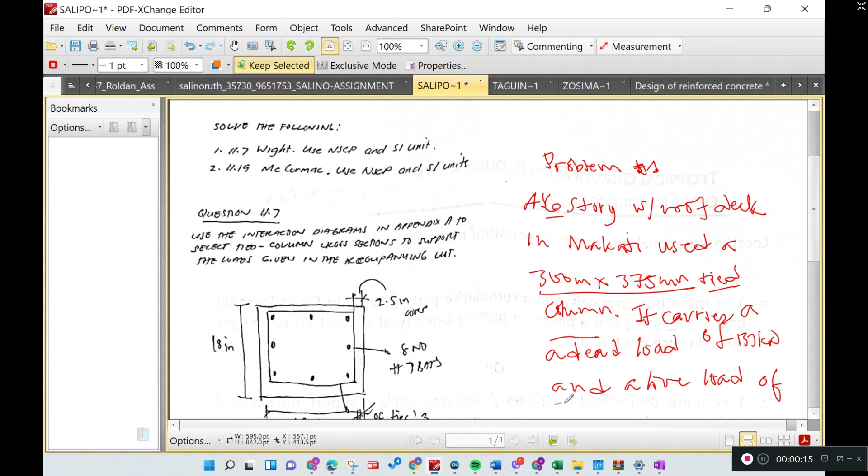Kilonewton and load. Sinakita ko lang sa inyo na pwede naman isulat eh. And a live load of 206 kilonewton. Diba? So, alam ko na kaagad na ito, dead load ko eh. Yun, in live load of 206. Can I still get that?

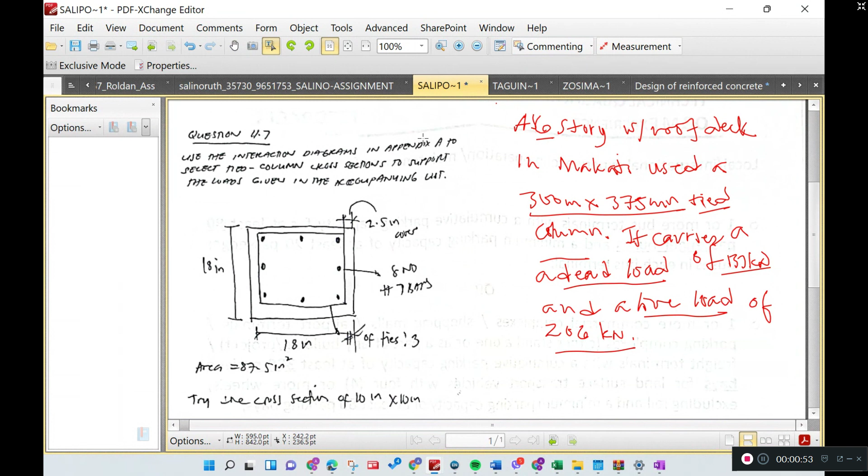Anyway, so please write especially the assignment. Now, if we are in assessment, it's up to you whether you want to write it or not. Para, di ba, yung iba, napapansin ko lang na what they did, para at least yung kanilang utak, they write muna. Some of our students are like that.

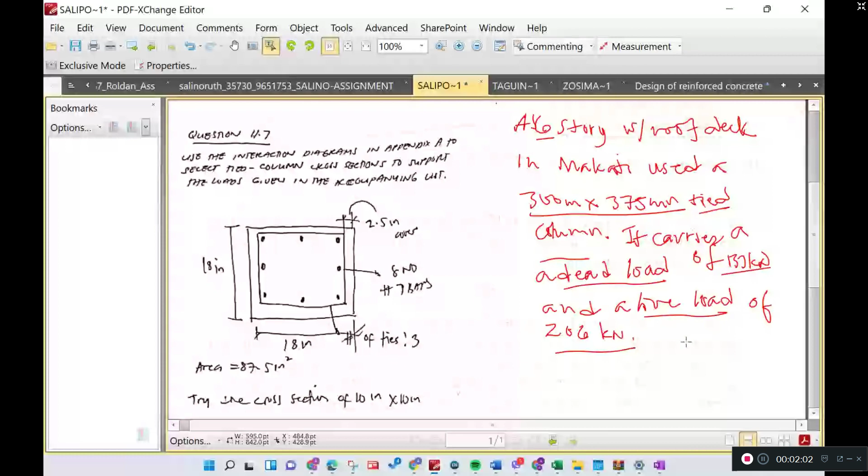And like those assignment, I would like you to write there because you are not, I think 28, 29, 30, it's 2 days. Okay, 2 days with 2 problems. We usually just have 3 hours in 3 problems. You can see the difference among the 2 assessments. Okay, assessment. Now, assignment can also be an assessment. We are trying to assess first whether you are going to do it. But it's an assignment. Number 2, whether you have correctly answered the assignment.

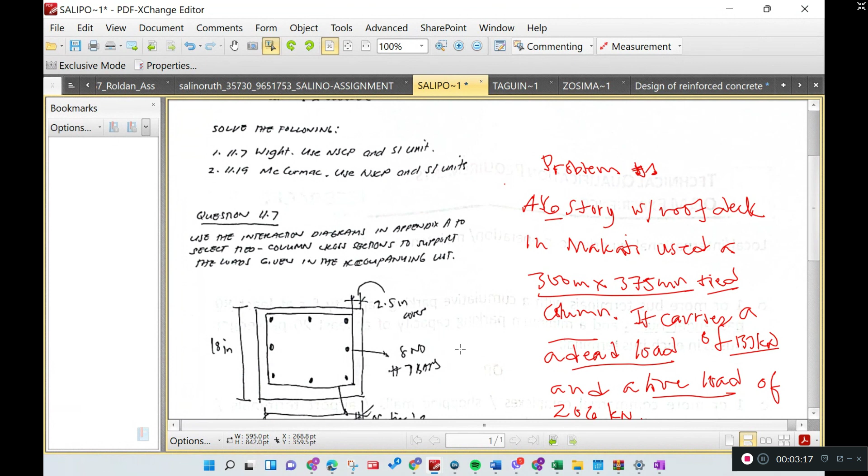But there are 2 things that really matter when you are given an assessment. So assignment is an assessment in a way to check those behaviors, psychological. When you do that, only when the time has to be submitted, yung naiba yung nangyayari, hindi mo na nailagay. Saka iba din yung writing mo, so hindi siya makukumpleto. Okay? So I'm telling you na that's psychology. Kasi patapos na eh. Kailangan mo na i-submit eh.

But notice that assignment is as important as quizzes. I can only just give it 10%, or I may not be giving it any percent if I see that when it precedes a quiz, then I would just say I think it's alright. I can get something from the assignment. Just like what I did last time. In our slab design, I noticed that a lot of our students did not do it. Please do it. Okay? Please do it.

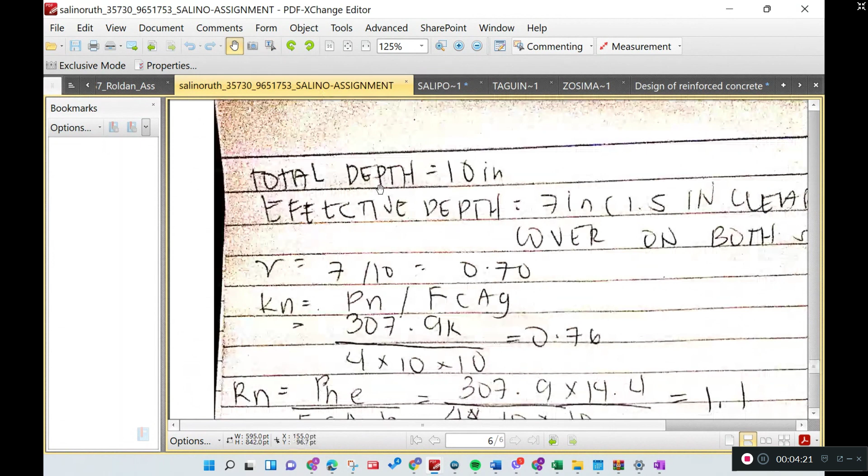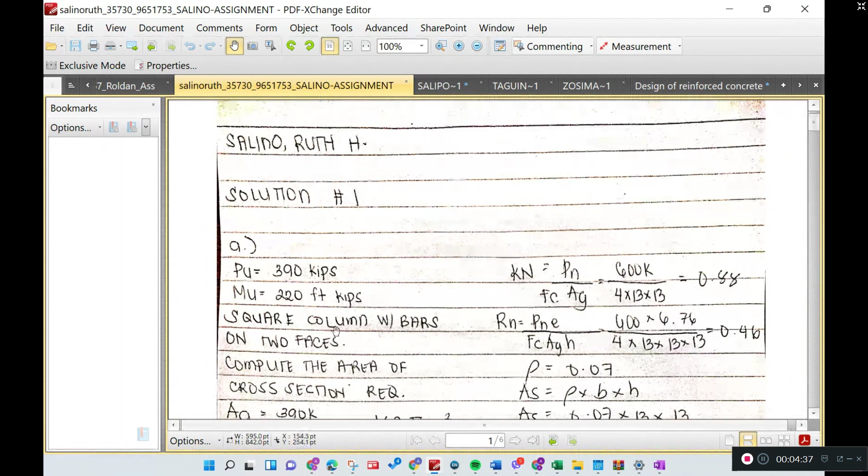So we also have something here. There are 23 of them. As I said, I checked this one. I put them in my spreadsheet, but I would like to tell you that he's right. Ito lang yata sumunod eh, si Christy. Christy is not around yet. So I'm just giving you that. I hope that it's clear between us. So this one also is not clear. This one is from Roldan. Is Roldan around?

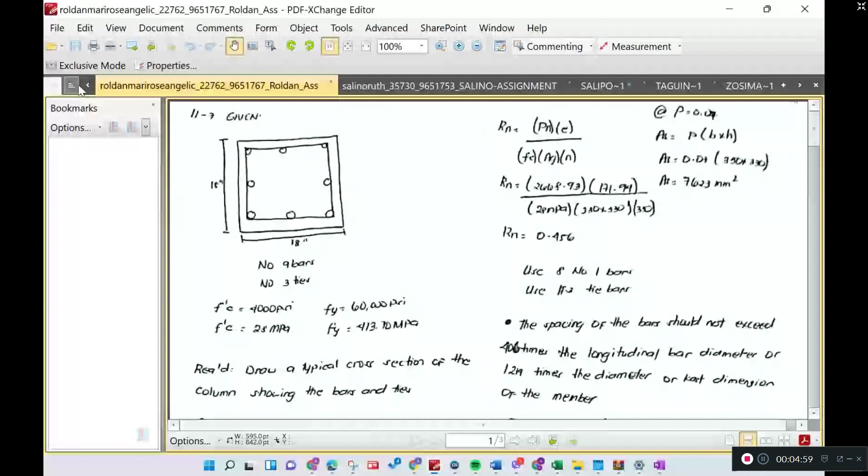Let's have Punelas, sinulat, isa lang nagsulat, at saka si Dolatre. Nga lang, hindi masyadong clear yung kwento natin. But to me, it's okay. Padlina, let us check. You see, sinulat ni Padlina. Then, let us check. Okay, and you, pero dito, nilagyan mo. So, those are the things that you have to take care of.

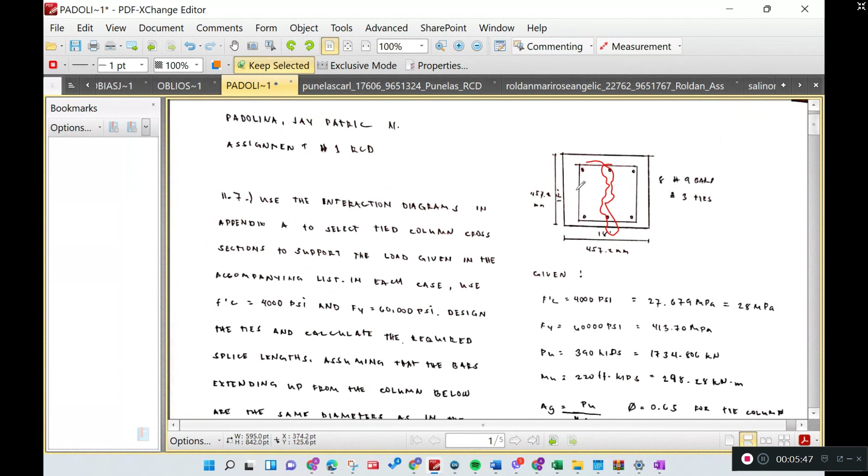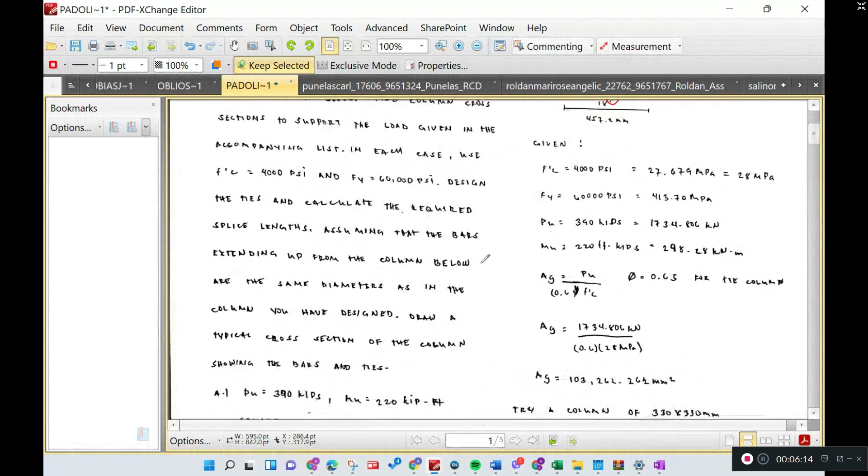So, we are now solving. These are many phases that I would like you to take note of, okay? So I'll repeat. I'm telling you that your quiz is this, okay? I give you a chance for some of the students who are doing it. So the spacing of bars should not exceed. Okay, that's good. This is for compression.

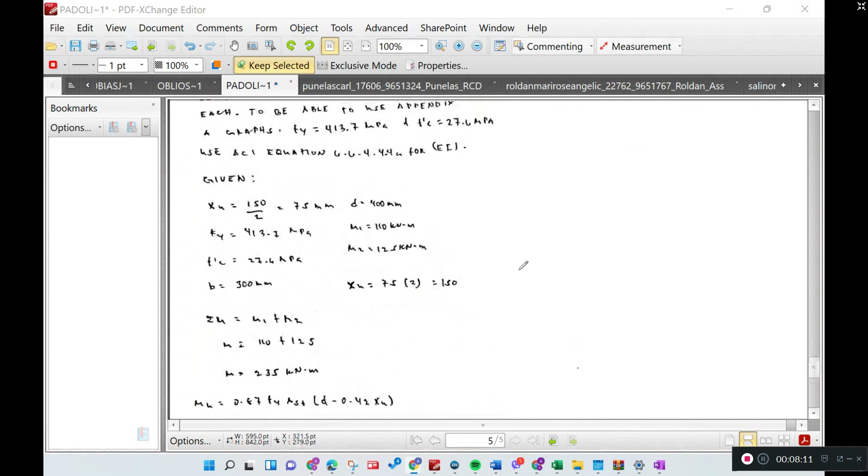I'm going to give you an example, but not exactly this. The same problem, but not exactly this, because I'm giving this one as your assignment. Okay? Because I'm giving you a similar thing, just like if it's a banana, I'm going to give you banana. The same thing. But again, what is important is this. Okay? You run a mile. I think that's important. What is important is that I would say a mile, okay?

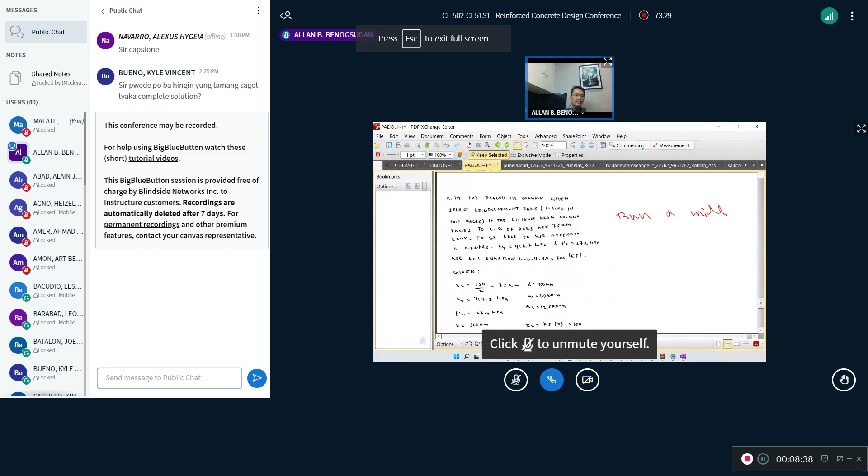Kahit sabihin ko na mag-discuss ako many times, okay, I have so many courses already. We give some examples. Some examples are not effective. Some examples na binigay the student. But with a conceptual example, maraming natutong estudyante. Kuha mo, Kyle? Kyle, are you there?

Yes, sir. Why is it important? Because, say for example, you have a column. You have your column subjected to axial load, and there's a moment. Okay, there's a moment there. How are we going to do it? So, are we thinking of a biaxial? It's not. It's only one at a time. Okay, so this is what we're doing.

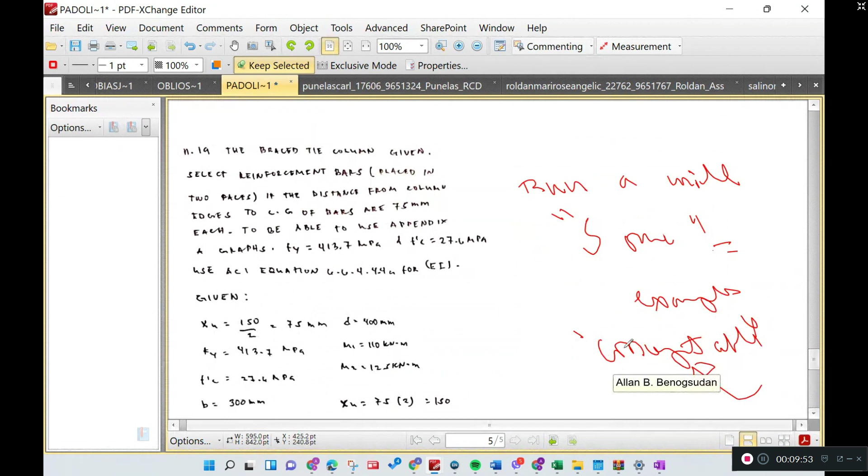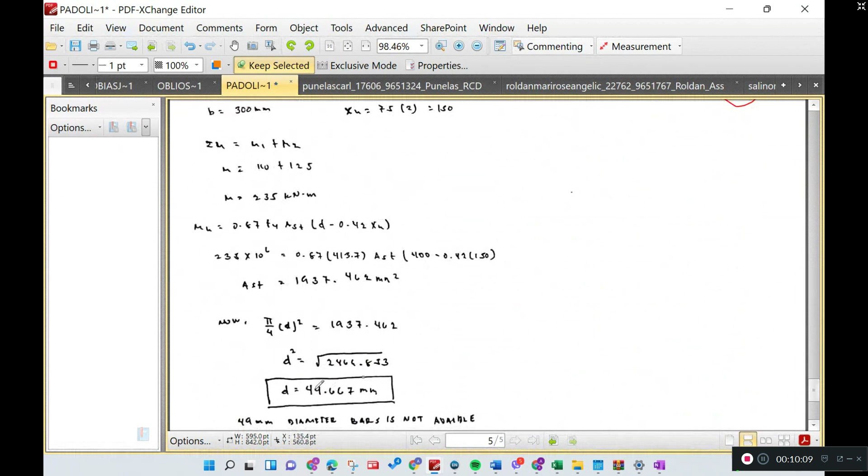I'm going to give you an example. After this, I'm just showing you so that you don't get surprised. I don't like surprises. I would like you to know how I check your work. And that, to me, is not okay. Alright? So, 11.19, not done. Not done. But there's something in here, but it did not get through. Let us check what is in there.

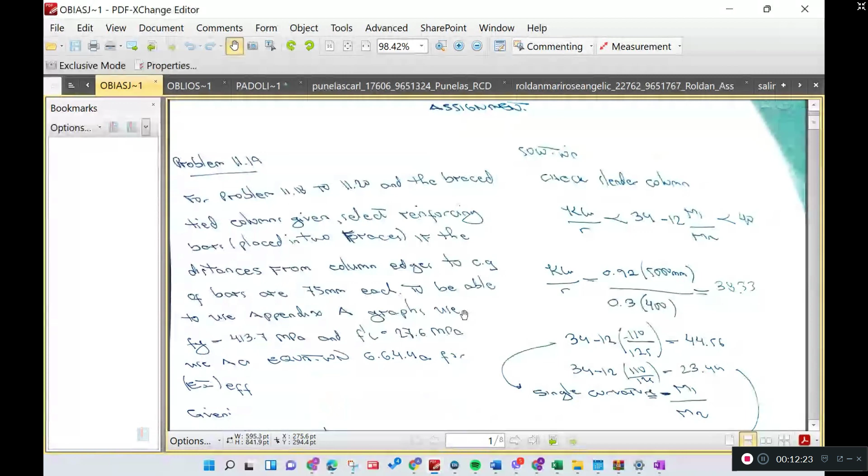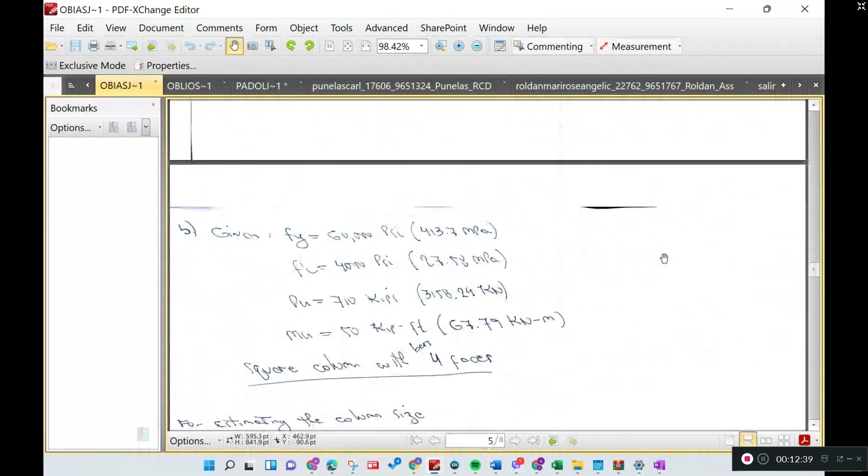So, this one is Obias's. I think we've been doing that one. And another is, okay. Check if the column is slender. Check the slenderness of this column. This column. What happened? Obvious. Okay, that's there. But you did not put it. Okay, so let's have an example.

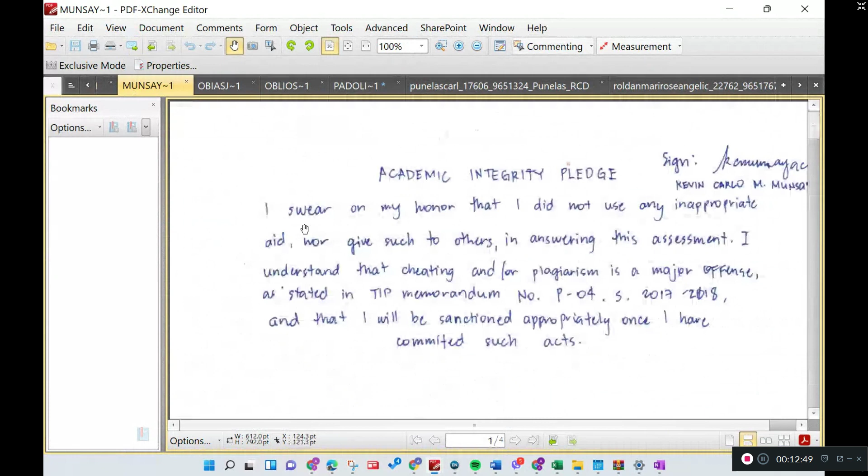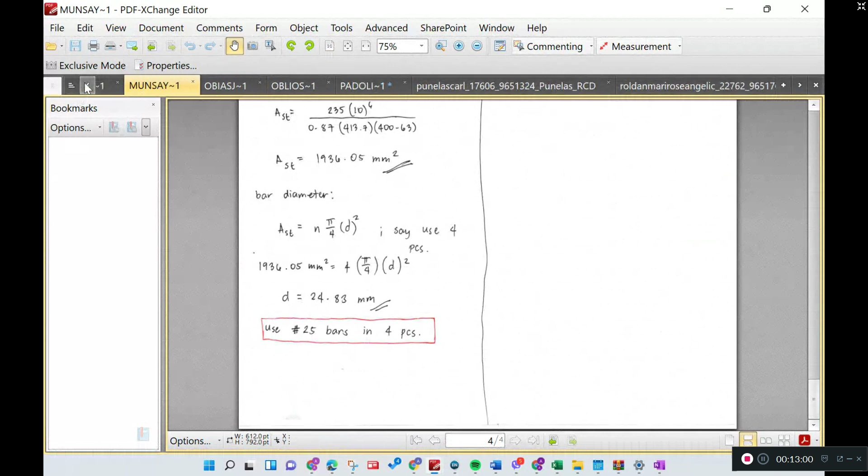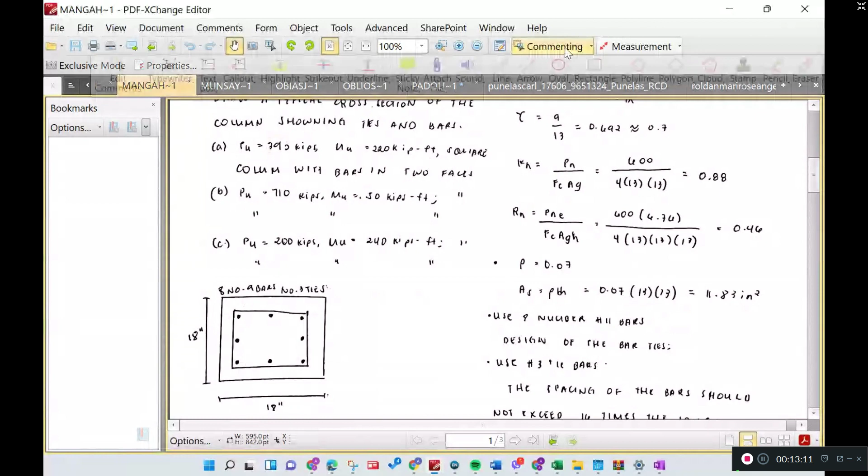Mangah is here. Wow, I like this. You have to write, okay? And so we've shown you these. Use diagrams, yeah, that's it. So this is very important. This is an important matter for all of us.

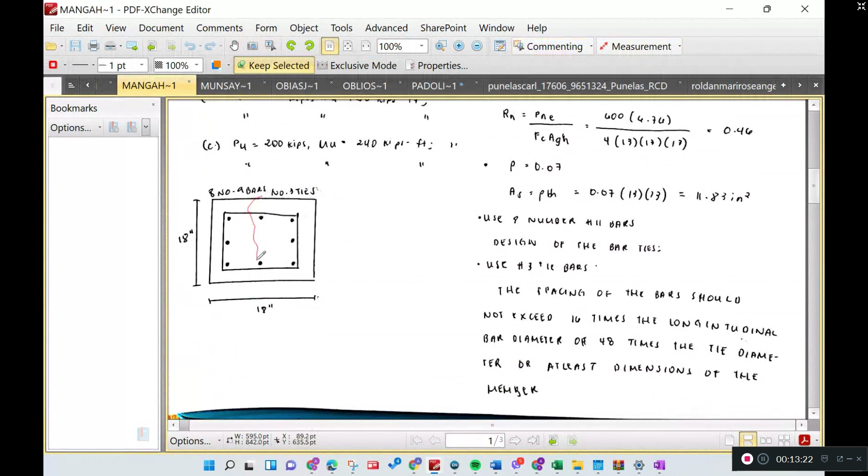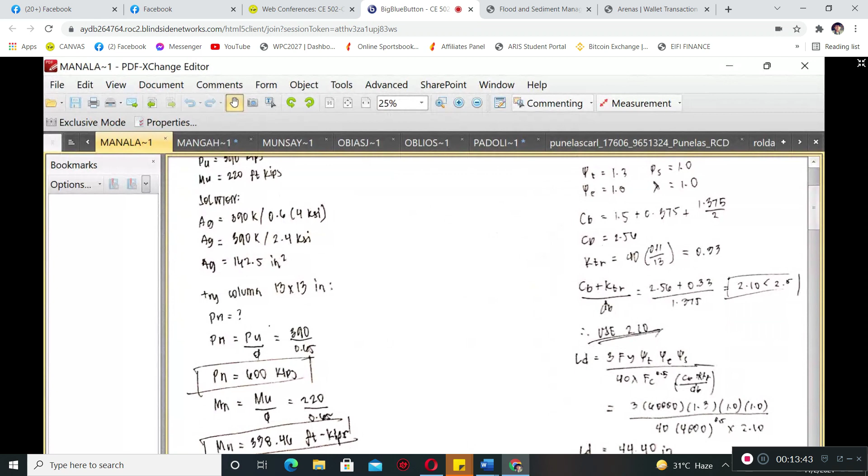Number 2. Manalastas, are you there? Sulat lang. Try a 13 by 13 inch column. So that's the reason why we tackled this. You can see, Kyle, why we tackled it, why we have to check your submission and tell other students how it would be.

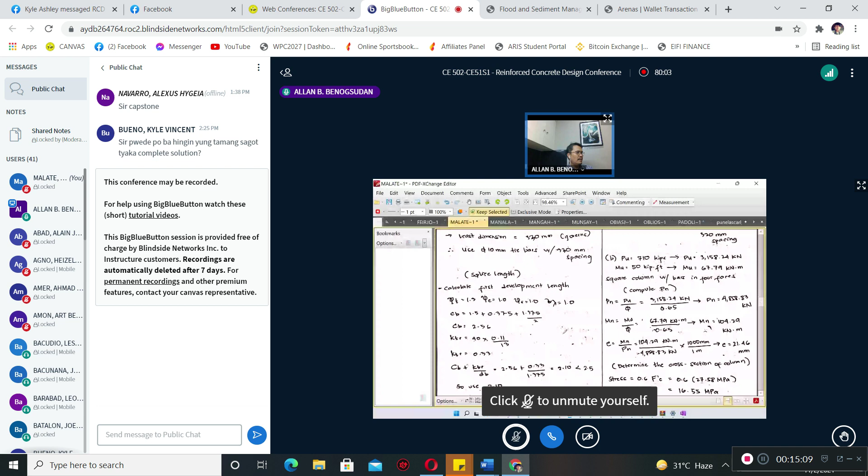Here, I would just like you to appreciate that, putting that one there. But I would like you to write. Okay? I would like you to write. Let us solve one problem. Okay, one problem. Good problem.

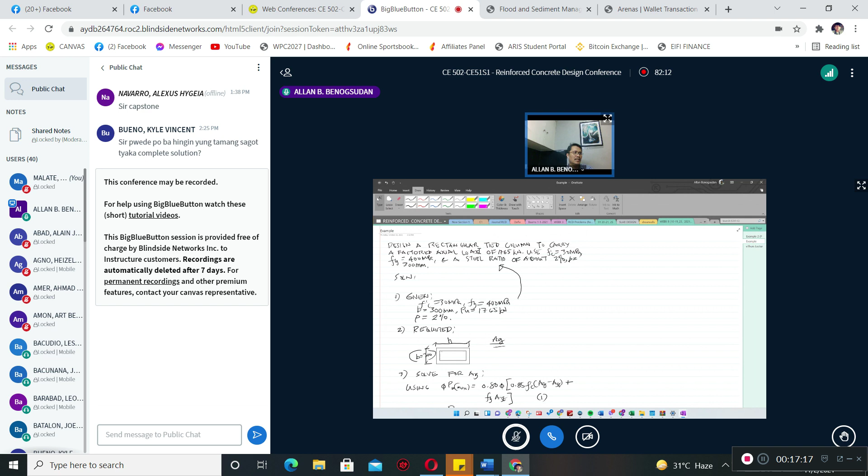Design a rectangular tied column to carry a factored axial load of 1765 kilonewtons. Okay, now my question is, is this detailing correct? Got it. Okay, so let's have a problem. Dito.

Let's have the problem. Bilisan yung bilisan yung pituan. Okay, so, okay, now

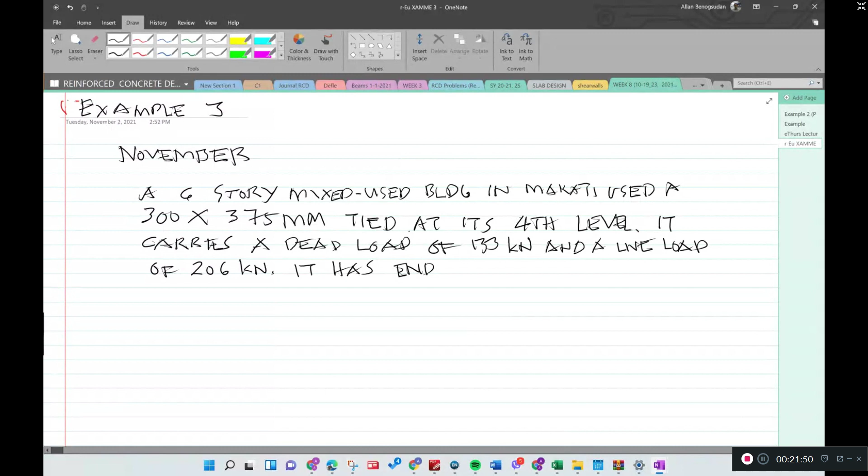fy 413.70. And K is equal to 0.83. This is given. And that's why you can see, I asked earlier, Amon, how did you get 0.92? Okay, was that given? So I think that should have been the answer. Okay, it was given.

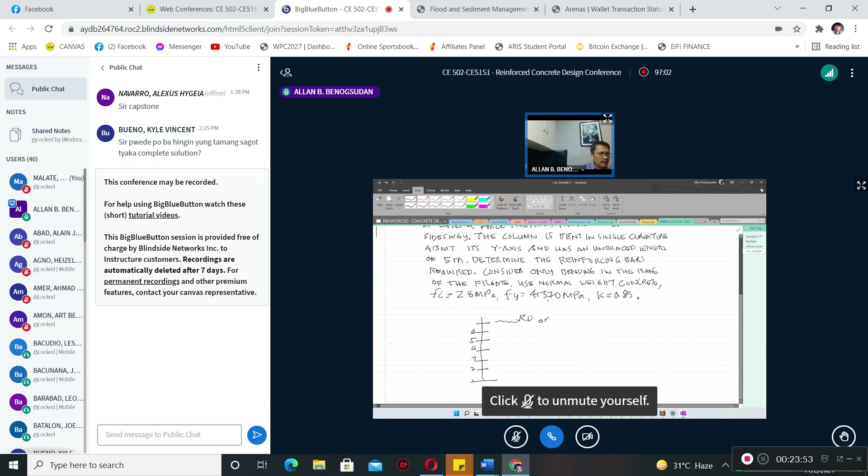Five, 6. What about this? What about that? Okay, 1, 2, 3, 4, 5, 6. So it might be, okay, the problem did not say so much. It might be this part can be a roof deck, or it can be a simple roof beam. So you might have the truss, whatever the design. Might be a roof truss here, or this one can be your roof beams.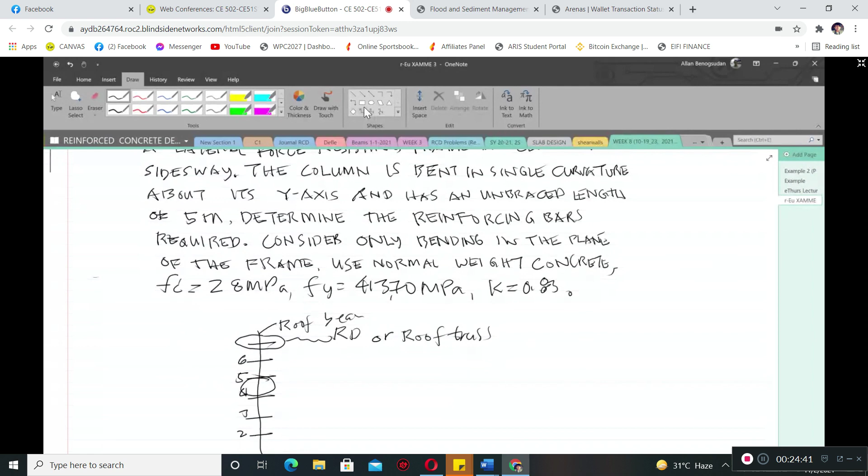Can you imagine that? Because if this is your first, second, third, fourth, fifth level, so it's your 6th level. So what happens at the top of the 6th level? You should provide cover against the environment. And it's not also clear. I gave you this problem because it's part of an actual problem. Now this might be the one that you are doing currently.

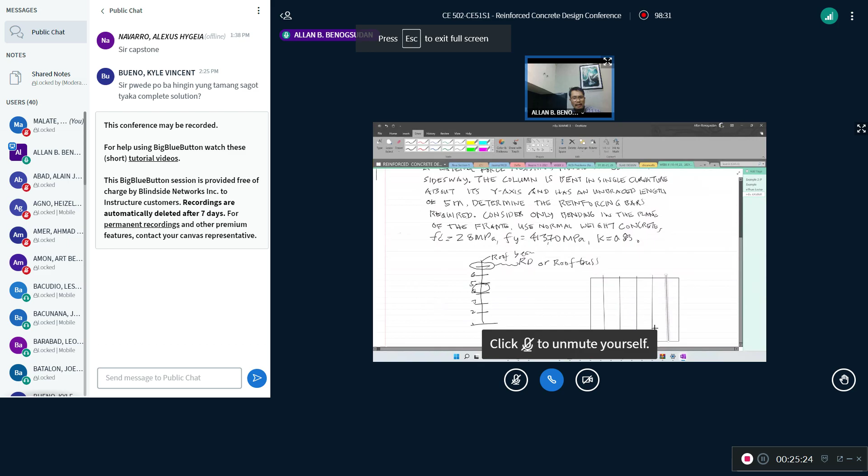I'm showing to you everything because I don't like that we duplicate this one with the design report. So every time that we are doing an example, we are also giving a practical use of the example. Practical use of the example. Yes, Padolina.

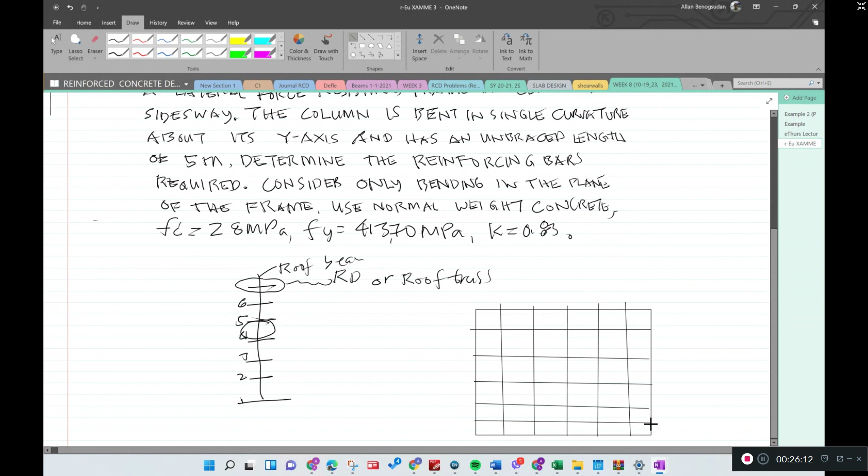Sir, same topic pa rin po ba yun? Or ibang topic na po? What do you mean? What are you asking, Padolina? Please repeat. Sir, tanong ko lang po kung same topic pa rin siya doon sa column? This is a column. We are doing a sample in column. This is tied column, okay? I'll put it explicitly. We are still in tied column.

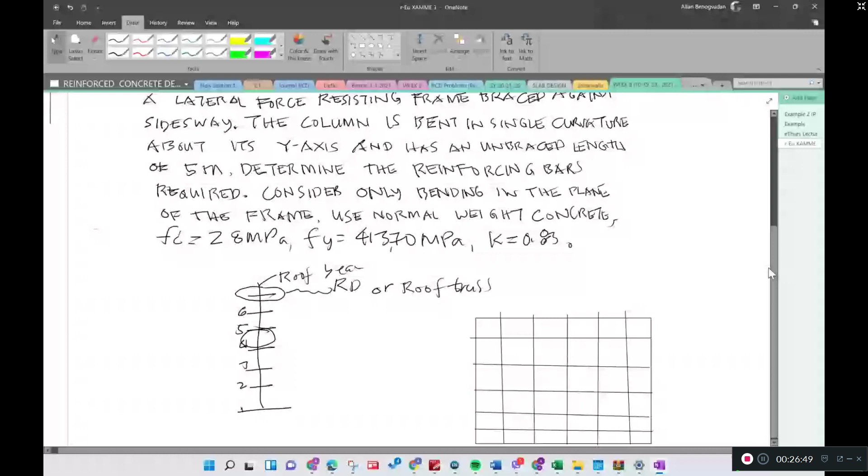What I'm just saying, Padolina, is that you can have all those examples, but the question is, what are those examples for? Where can we use that? You're taking civil. Just like what I require, it's a hand-picked assignment, because I know that you are doing your design report. For those students who actually have studied the samples and the problem that I gave you, it's the sort of thing you should have done in the design report.

Because you are designing a reinforced concrete building, and many times we said, I think we have this one recorded. Please check that many times when we are doing this, we try to also at the same time apply it in our design project that we are doing right now.

What I am doing right now, Padilina, is a grid of a building. The solution here can just be too mechanical because there is a process to do that, and why do I have to reinvent the wheel? I just got it from the book. No secret. Everything that I gave you is just in the book. I just changed it.

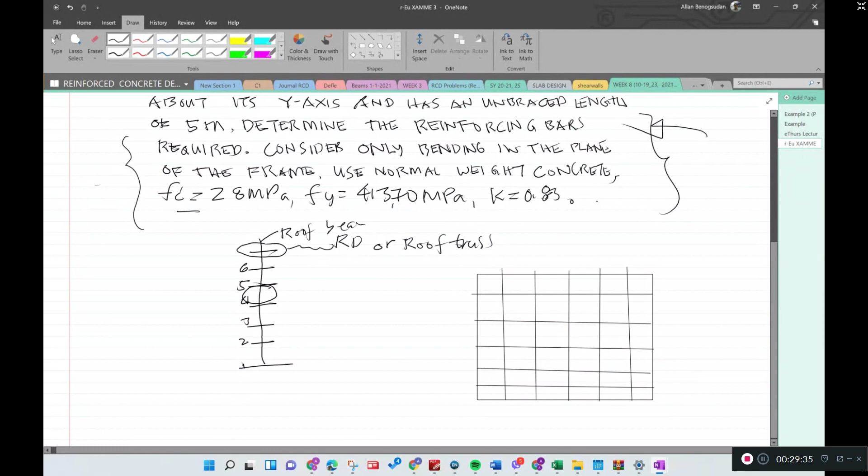So I'm going to label it, Padilina. What I'm saying here is that this kind of problem can just be any problem. Actually, this is from your book. I just worded it that way. I got it from a reference. So what about this, when some of our students have solved it already in their assignment? Padilina, have you recognized this problem?

Recognize that? Yes, sir, pero medyo hindi ko pa po alam paano approach na, paano sisimulan. But you were able to solve. So how did you solve it? You have your assignment, and anyway, I'll check your assignment.

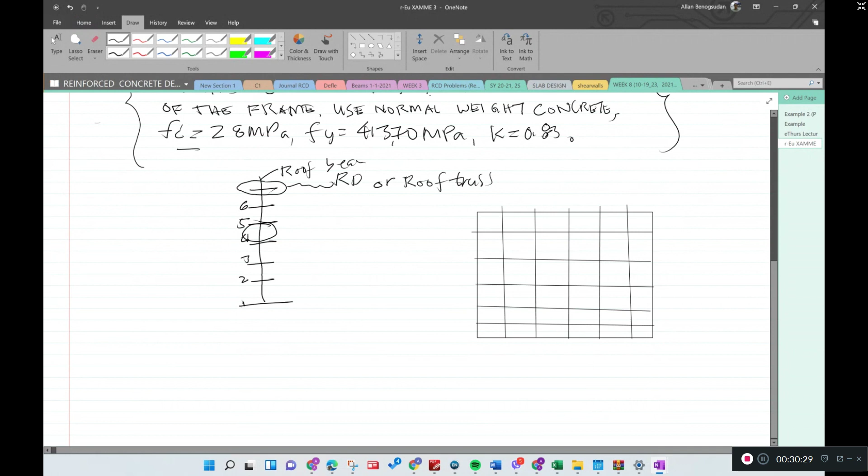Okay. That's why I'm helping you in that way, to Castillo last time and also to you. So again, it's not only like that, because the problems, as I've said, I just got from our reference, the one that I gave you to study. Okay, I just changed some, but it's just the same in your book. Okay, in our book.

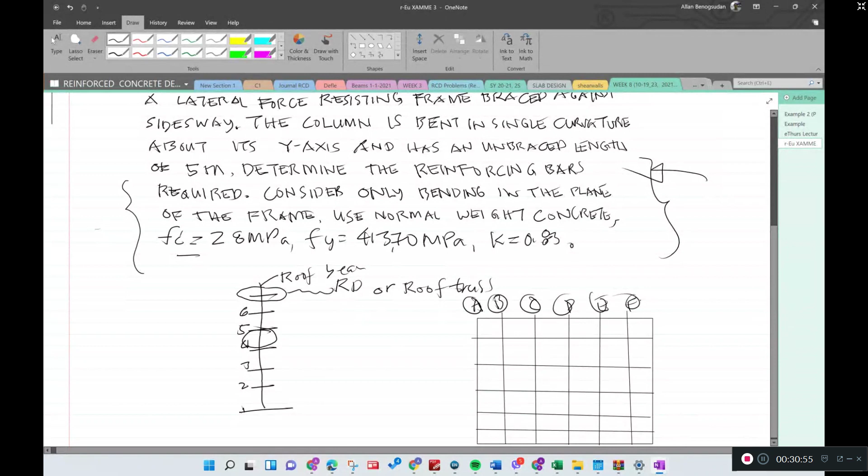Instead of just like that one as a mechanical, this one is A. I'm talking about your problem in the manuscript. These are grid lines. Okay, F, G. For example, that is in terms of 7 meters.

So what I'm showing is that we are hitting two birds at the same time, because we're going to solve this, and at the same time, I hope you're going to apply this one. Not I hope. This is what I'm looking for in your appendix, in your solution of your manual calculation of your columns.

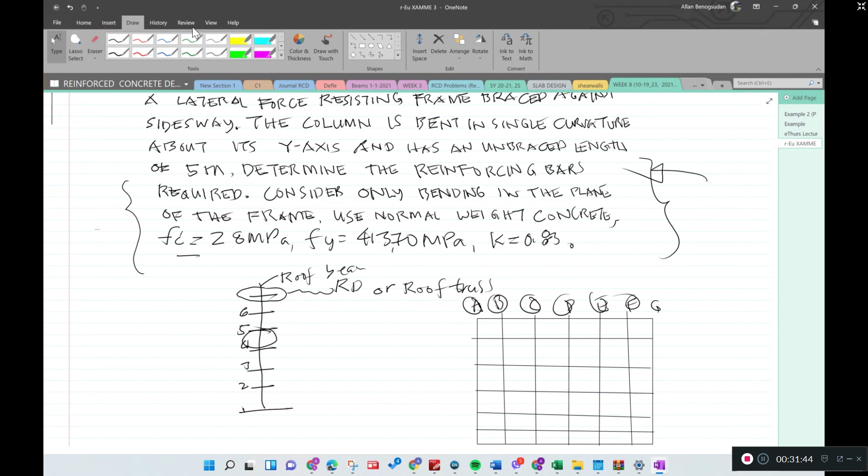That's why I gave you a bird's eye view of what all these things are, because if not, the next question is: we have studied this column, and how are we going to apply it? Because the solution here is just simple. There is a procedure. Ilan ba procedure? 2, 4, 6.

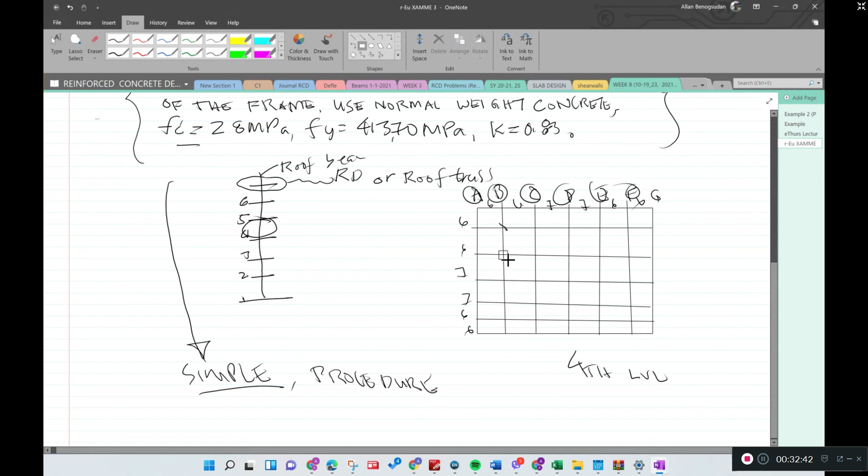But what I'm saying is that, say for example, this one is the fourth level. This is my building. This one can be 6 meters, 6 meters, 7 meters, 7 meters, 6 meters, 6 meters. Could be 6 meters also, 7, 7, 6, and 6. So I can have columns at the fourth level here. So I'm going to plot them here.

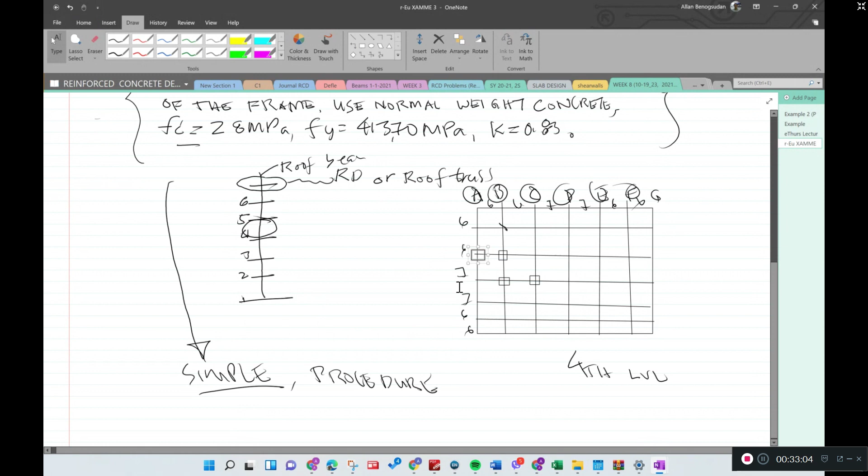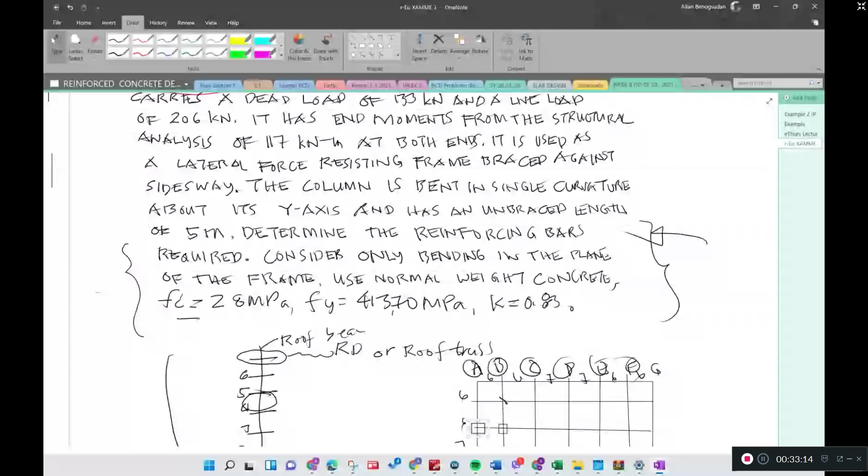So what I'm saying last time, I'll repeat. This problem I just got from our reference. There's a problem and there's a solution there, and that is simple and it's procedural. But the thing is, saan natin gagamitin? At paano natin gagamitin? So I'm just saying that it's here. And that's what I also not presume, but expect. Presumption is different from expect.

And I have a mandatory expectation that you submit to me a manual calculation, just like what we are going to do now. It's just an example. So all of this can be just a column. If you are going to trade off, for example, you can have your column there. Notice that in terms of analysis, they too can have different forces.

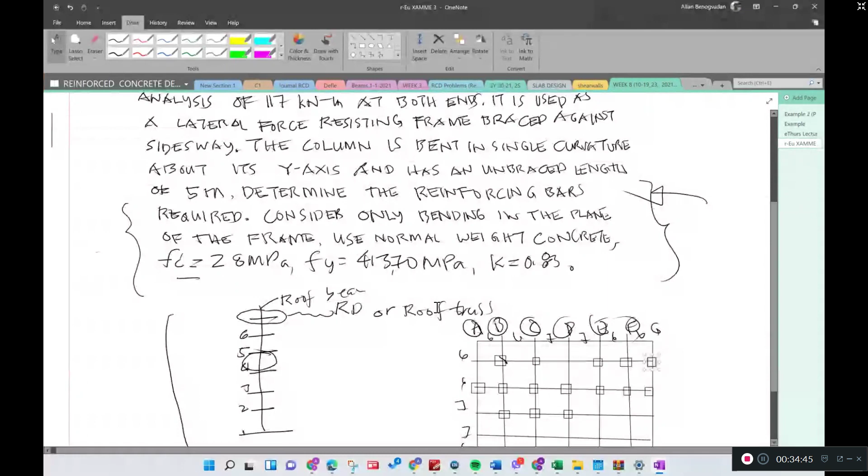Say for example the architect doesn't plan a column here. So what you are going to do, you can have a greatest moment here. You can also say that this part is what we say in the problem: unbraced length Lu, determine the forces. It is used as a lateral force resisting frame braced against sidesway.

But it does not say what part of the building, what part of the fourth level. Is it grid line B? Is it grid line? Huwag kang isasarado. Example, this one, two. Ipapakita ko ang something sa inyo. I'm showing to you how you're going to present your solution in your design report.

6, 7. Let us say it's here. Let's say that this part is here. Okay, so you don't get confused. So let us first plot it by drawing. How could it look like? So I would say that we have my point. Padlina, is it clear to you now? Okay, so let us say this is one of that.

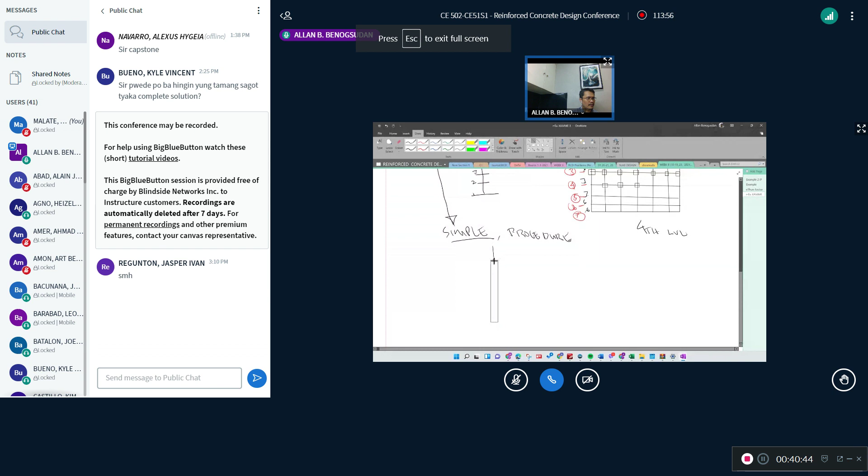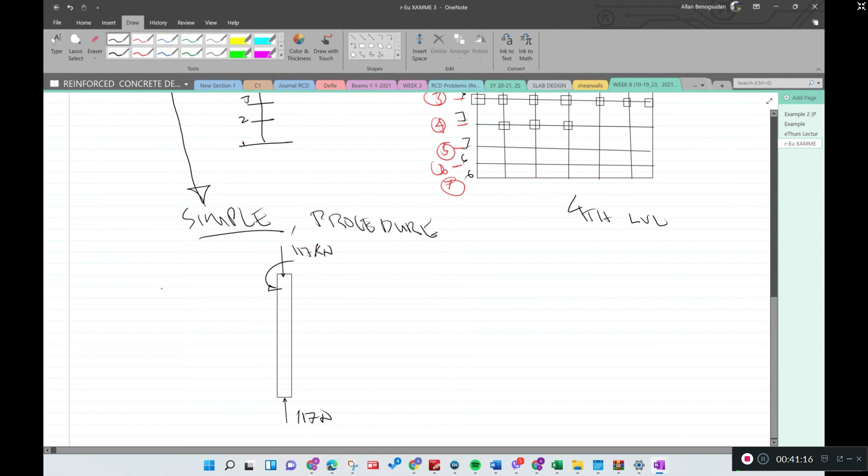117. Is that correct? Now how are we going to plot it? 117 kilonewton. And that, have your M sub 1 equal to 117.

how much is the unbraced length? It's equal to 5.

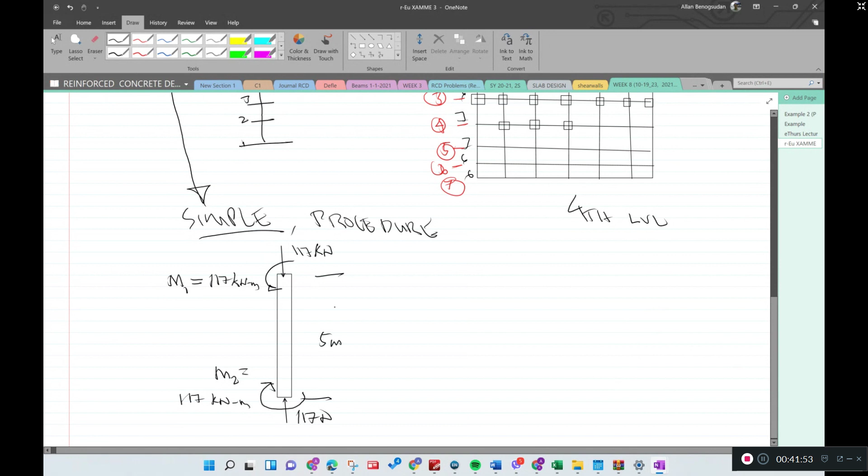let me say that's your 1, 2, 3, 4. You do not know yet, so just put it there. 1, 2. That there, there.

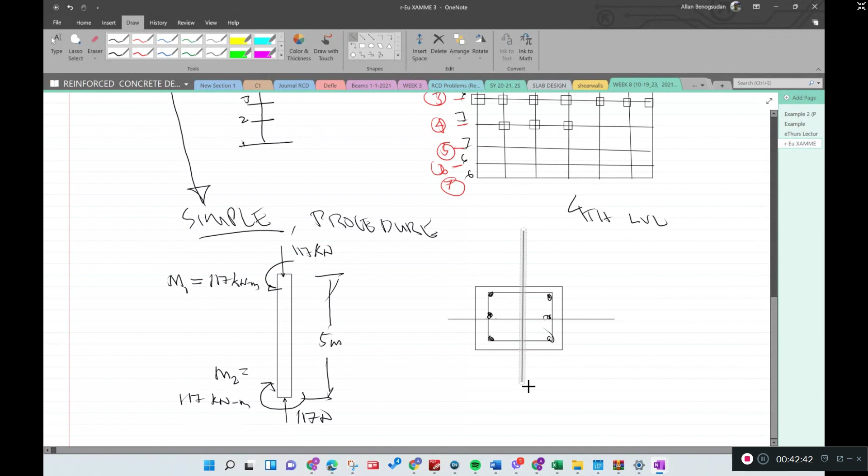Trying to put it at the center. And that it's your x, it's your y.

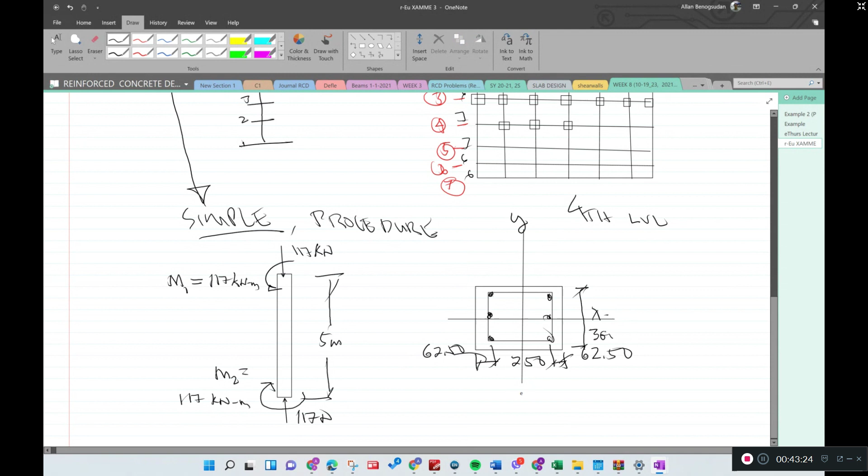So this one is 62.5, in mm, okay? That's in mm, and this one is 250. One is equal to, that one is equal to 300. It's equal to 375.

The first thing is that we try to check if this one is slender or not.

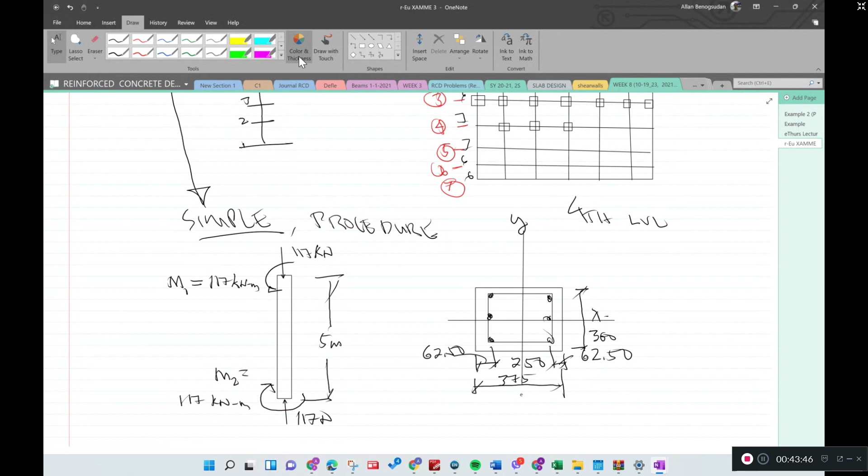So notice that, are you not going to ask me where this is coming from? Maybe you would like to ask. If anybody would like to ask.

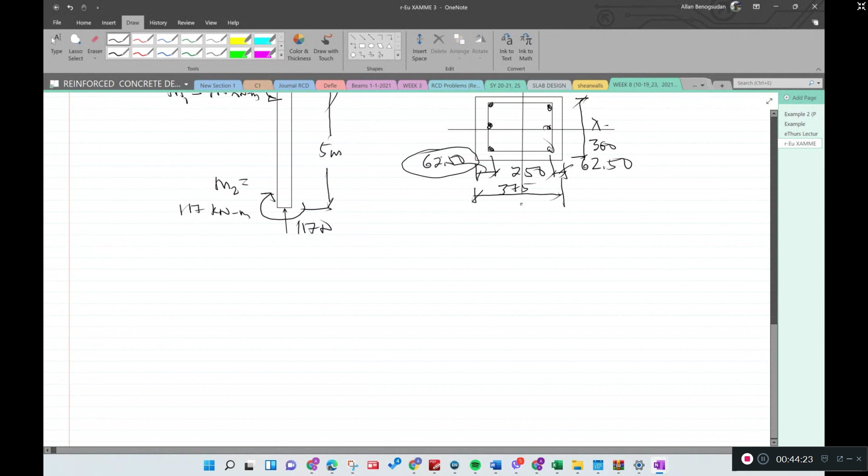So now notice that you actually have not asked me also about this. But I would like you to ask me. Okay? Because it's not part of the problem. It's not part of the problem.

So I'm telling everything that you think could be a loophole for you, and I will say, okay, I think your solution is not okay, because you simply just put 62.5 right away. So if it's not there, I would like you to write.

Assume distance from cover to centroid of the bars. Understand what bar is that? Bars, or offset of the bar, is equal to 62.5.

And then, so without this, I can say, you've gotten this, where have you gotten that? So it must be assumed. You have to put this one explicitly.

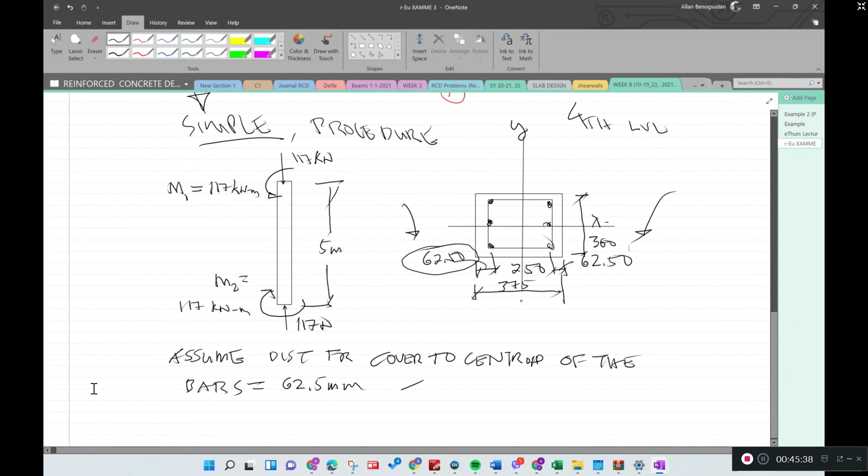Okay? Then, of course, you are now going to start the procedure for solving. Okay, it's just there.

So check the slenderness of the column, just like what Bobby said. But I would like you to put the word 'check,' okay? Not just simply slenderness, because you still have to check that with the specification, code specification, and that is why you have to say check the slenderness of the column.

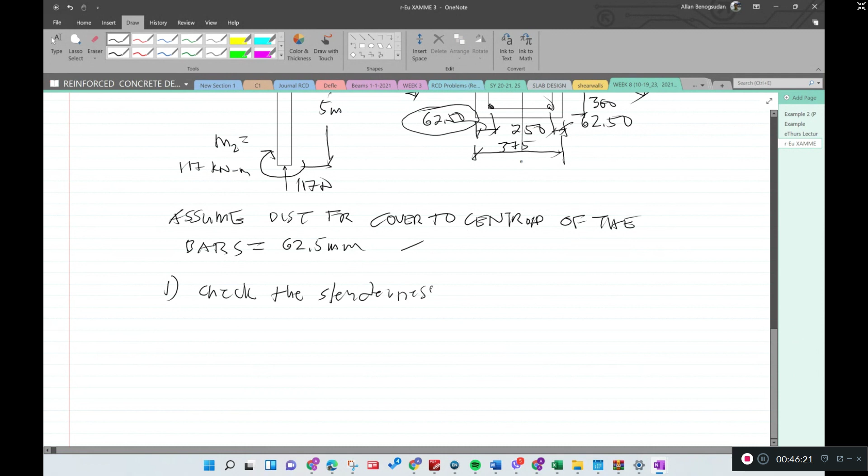Okay, so Max, that's what you have from your assignment, okay?

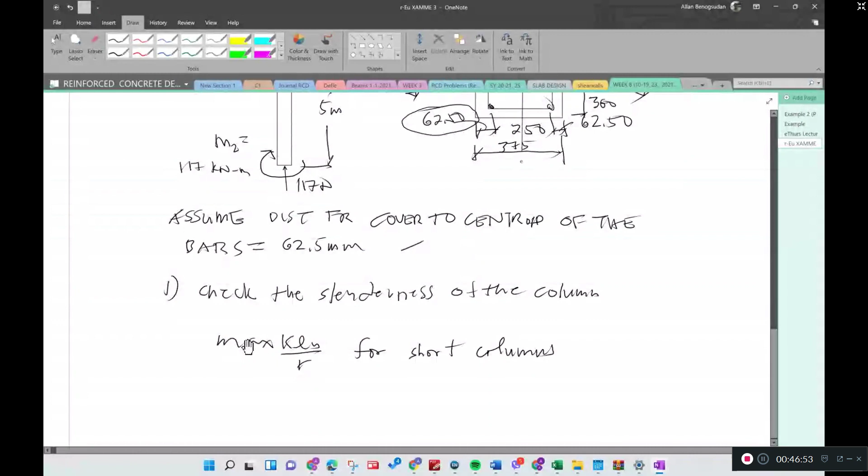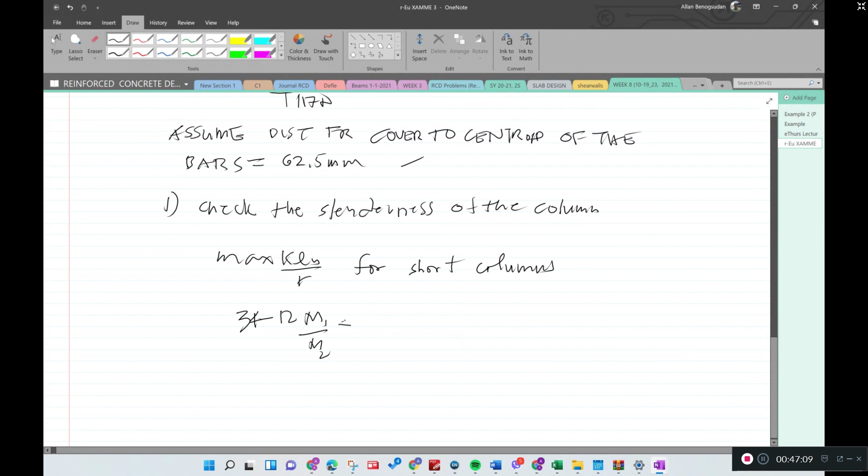So we don't reinvent this one, okay? We did not do, okay, 34 minus 12, okay? M1 over M2 is equal to 34 minus 12 plus 117, plus 117.

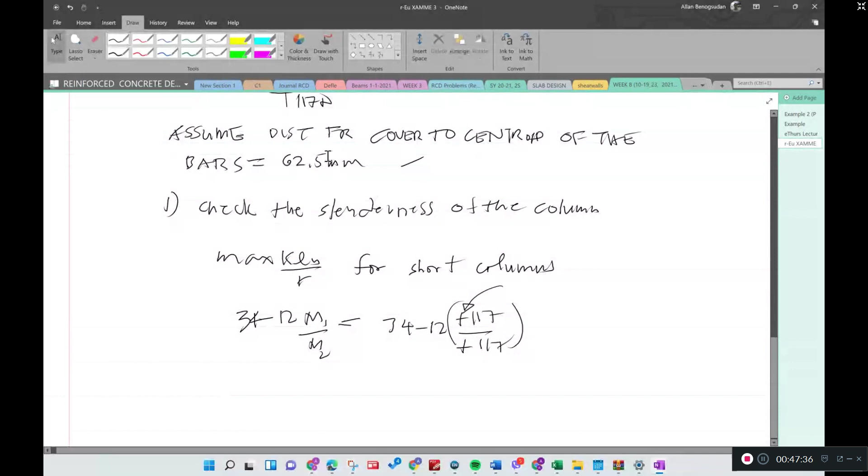This sign is very important, okay? Because what if this one is double? What if this one is single bend? You can see that it is single bend. That is single bend.

Okay, that is single bend, and that is why I said that you can only catch the problem when you try writing that. Okay, when you try writing that. What is this for? Okay, what is that for? And I asked you earlier, are you not going to ask me about this? Okay, so my time is 3:31.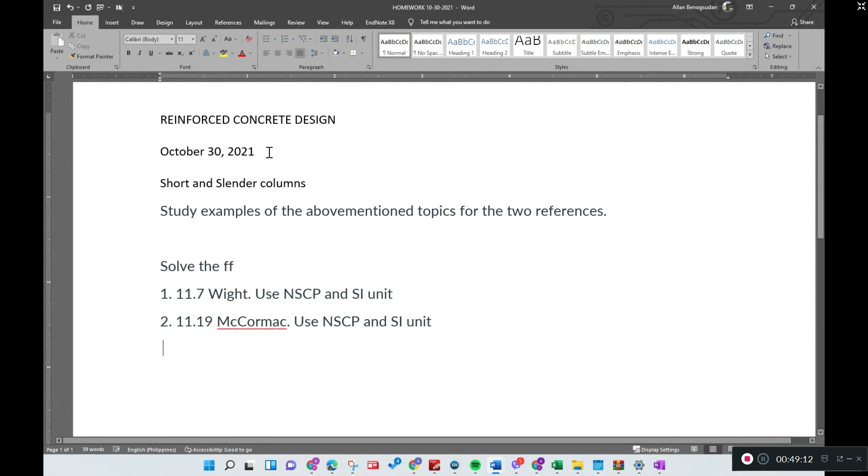Thank you po. Yeah, we're going to discuss this one once more because, as I've said, it's two-sided. Okay, right away. I just would like you to appreciate what are those things that we are trying to study.